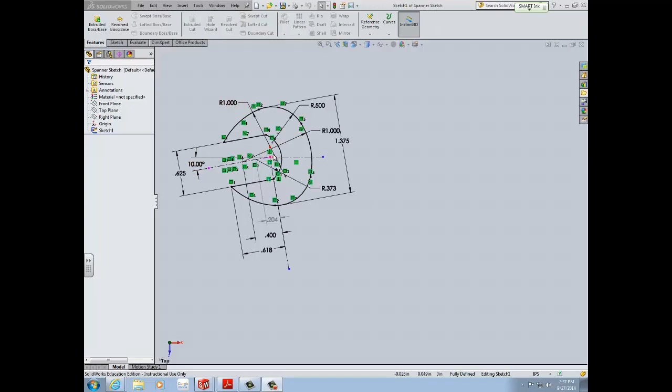Basically, I'm going to leave this up next to it. I'm going to just draw it right next to it. I'm not going to worry... actually, can't do that because I need the actual center point. That's going to clog up the whole area. So I'll keep this open, and I'm going to just create a new part.

I could switch from one page to the other by doing Control-Tab. Now I do have a lot of these sketches open. I'm going to close out whatever I don't need, like the previous job, making sure I saved my projects. There's the spanner, I need that one, and I don't need that one, so I'm going to close those out.

Again, all you need to do to switch between drawings is Control-Tab. You hit Control first, then Tab, and you can keep hitting Tab until you switch between two drawings: my part, which has no sketch whatsoever, and the actual spanner sketch.

So basically, we're going to start out with a sketch, and we're going to go from top view. We're going to create a center line, so make sure you hover over next to the origin where you can see a dashed line. That way you know that you're exactly on the origin.

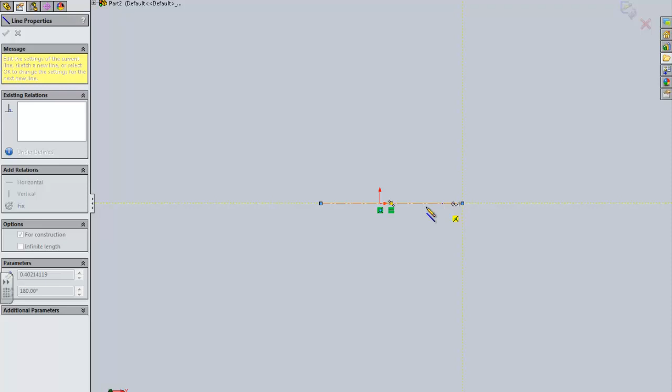You can see it's kind of, the line itself is defined, but the points are blue because we don't know what distance this line is. Everything else is black. Once we have that, I create a second line, a center line, from the origin, going about...

I'm looking for that 10-degree angle, so I'm estimating this to be 10 degrees. Now let's see how close I am. 17. I'm not good with degrees then.

So we do 10 degrees, we change that out, and of course that defines the line itself. It's black, but the points at the end are still blue because there is no distance provided, which we don't want because it's just going to clog up our drawing without necessary information. Usually center lines do not require exact dimensions.

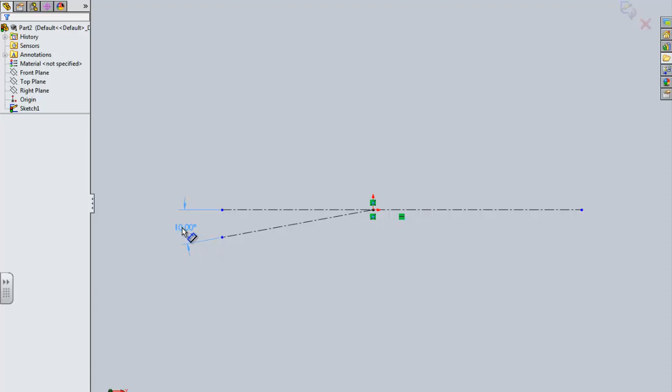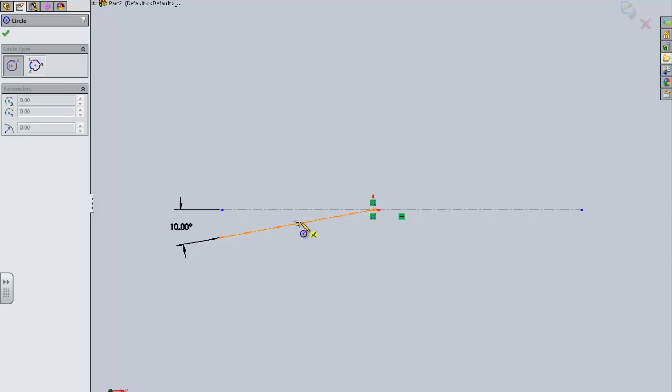From there, we're going to create - there's two options. We can create a circle. Yeah, we'll do that. So we need a point on this line for our circle. Make sure you don't snap into the midpoint because then you create a relationship that you need to delete later on. Just click it somewhere near that, as long as it snaps onto this 10-degree construction line.

Create a circle. The radius for the circle, if I can show you on the drawing, because we got this line here, we got the center line - you can see the previous drawing actually create a center line going one direction. You can do that too, it should not affect your drawing. We're looking for this point because we're creating this circle here, this arc.

So our distance is 0.204. Now you can see it's shaded - it's actually being driven, it's just for reference. So technically, if you drew it differently with all these numbers, that arc does not need a dimension. But that's why we need it, to draw it, make it easier for ourselves. So this is 204.

So we can dimension this out from the point to the origin. Make sure it's an angled distance, not a horizontal, because that's going to be a different distance. So you can just move it over, you'll see it angled, and there we're going to put in the 0.204.

So we have that snapped on, but we don't have the radius of the circle, so of course we need to dimension that out. 0.8, is that what I was looking for? Let's see what my radius is. 0.3. Okay, actually I'm working in inches. Okay, that's good, just making sure.

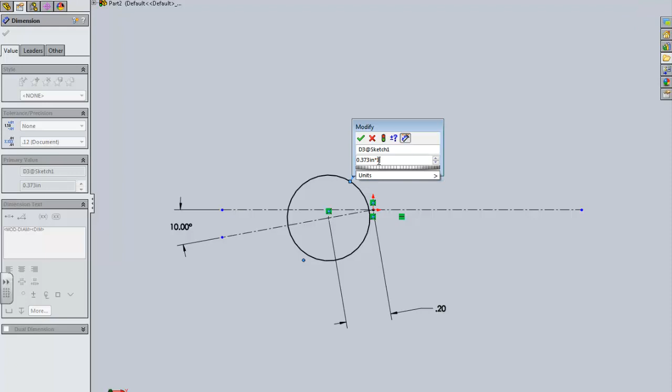So our radius for that arc is 0.373. I believe that's my diameter, so I need to double that. I do a star 2, and that multiplies it by 2. I got that number from right here, 0.373. So that gives us - and it's fully defined - so that shows us that we're exactly where we need to be with this arc.

We can add in the horizontal angled lines, like so. You don't have to specify its angle just yet. Another option would be to do one side only and then do the other side instead of doing both sides at the same time, but to make it easy, I'm going to do it at the same time. So I have these two new lines, the length I don't have specified. They are connected to my circle. I'm going to make them parallel to this 10 degree since it's defined.

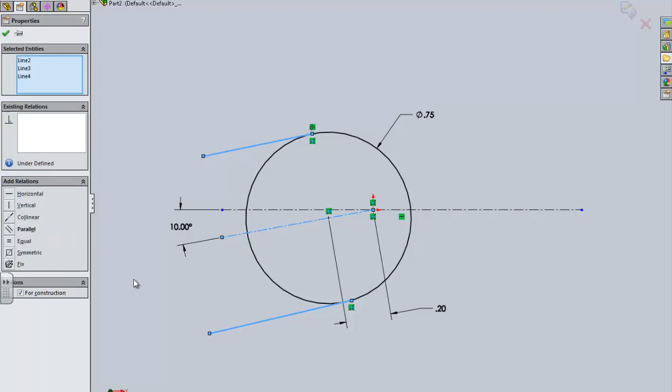So they're all parallel. This one is, for some reason, defined, and this one's not. I'm not sure why. Oh, it's not attached. Here's a tangent. This one's not a tangent.

That's all right, we do need to specify the distance of this. Also it is angled, so keep that in mind. Don't go horizontally, make sure it's angled. Our distance is going to be 0.618, and that would be equal on both sides.

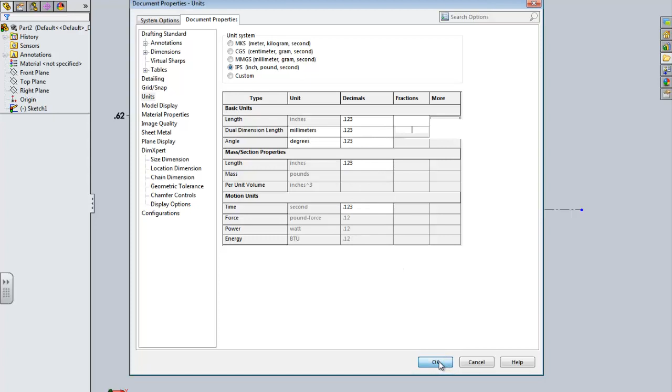Yeah, it's only 2, I can modify it to show you guys that there's 3. Let's see if I can do that right here. I'm going to change the length to 3 so you guys can see up to 3 decimal points since we are working so detailed. So now you have 3 decimal points.

Okay, once we have this piece completed, what we can do is start doing the trimming. So we go to our trim command up here, trim entities, and we just trim by drawing a line that cuts through the part. You can select the arc, the location, and the 2 lines here.

That doesn't look too well. And as you can see on the drawings, the point here, there's a center line, so we can actually add that center line. These points are connected, they're perpendicular to each other, I think. Yeah, so...

These are not connected, that's why I had a problem here. That's why it was tangent here, and it wasn't tangent here. So let me fix that now.

This is blue, make sure both of these lines are merged, so you don't have a problem like that with double lines. I need to figure out... yeah, see that? It's supposed to be a center line.

Following this dimension, and it is perpendicular to this center line, this 10 degree center line. So make sure you have that. Again, I drew a center line from the origin downwards, made it perpendicular to this 10 degree angle.

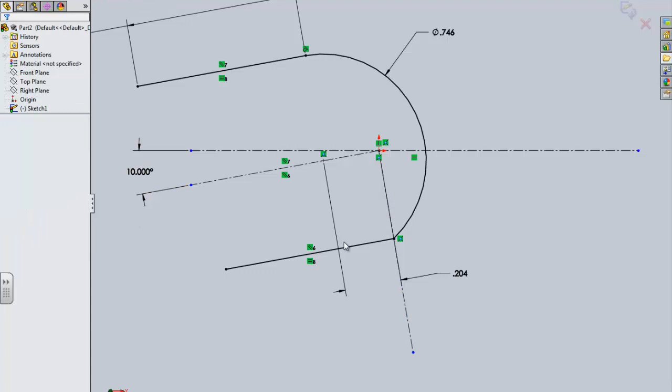Then I can select this point, end of this line, and this center line, and make it coincident. I also have to do the same thing with the top. The only problem is there is a tangent to it, so I will not be able to do it.

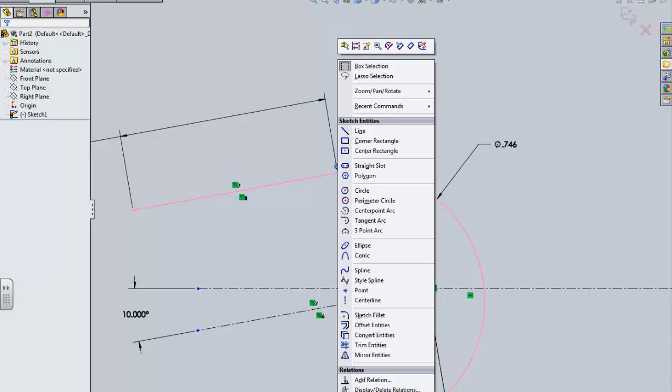Yeah, so I have to delete that tangent. I select the tangent and click the delete button, or you can select the tangent, right click, and go to delete. Two steps: delete on your keyboard, or delete with your mouse.

Then I can finally do the same thing as I did before. Select the center line here and make it coincident, giving me the exact shape I'm looking for.

Again, the center lines do not need to have their points fully defined, because they can be really long. It should not affect your drawing.

Okay, once we have that, what we can do next is the 1 inch radius circle, which we have the center point from, which is 0.4 from the origin. So we do the same thing like we did before, except instead of 0.204, we're going 0.4, and our radius is 1, or as a diameter it would be 2.

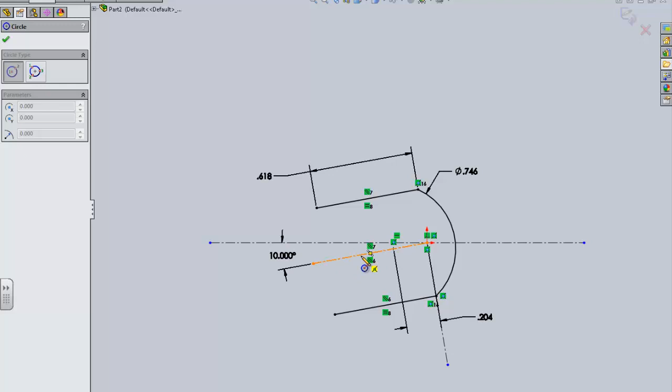So we go to a circle, we follow that 10 degree center line, we draw a circle, and that is going to be 2.

Like so. From there we can add, there's two arcs. There's one arc coming this way, and there's another one that's connecting the arc to the main circle we just created. See, there's one arc here, it's highlighted, and there's a second arc here.

So we can create an arc this way, in which we have the radius. We don't have the center of it, so keep that in mind, but we do have the beginning and end points. So we can do that, as long as we make them equal. I'll show you how we do that now.

We go with a 3-point arc. Right, I'm looking at something like that. Same with this. And I'm going to make these equal to start out with.

I'm going to dimension one of them. The radius will be 1, so it's a 2. Something like that, it's really big, but that's alright, you can even stretch it back down.

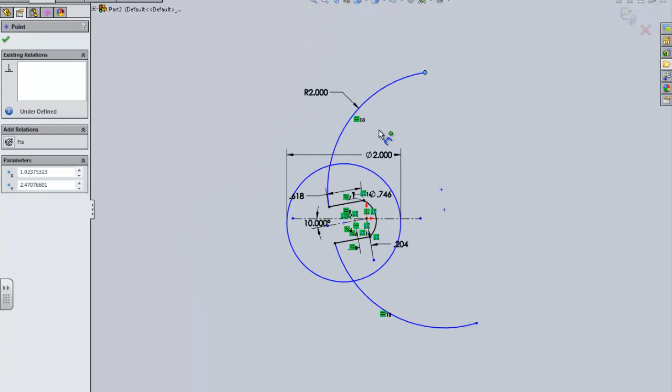Oops, I'm still in dimensioning, if that bothers you. Now they're both the same radius, but they're not the same length. That's also okay, we have our distance—no, we don't, we don't have our distance here from here to here, so we've got to add that dimension.

Oops, so smart dimension. Oh, we do have it, because we have the radius here. I'm not sure when I put that in. So if you have that radius, you can remove it. If you want to keep it, that's fine.

The other option would be to create this dimension here, which is 0.625. So you can see it was off, so now I have to readjust it to make it exactly the correct size, as our drawing shows.

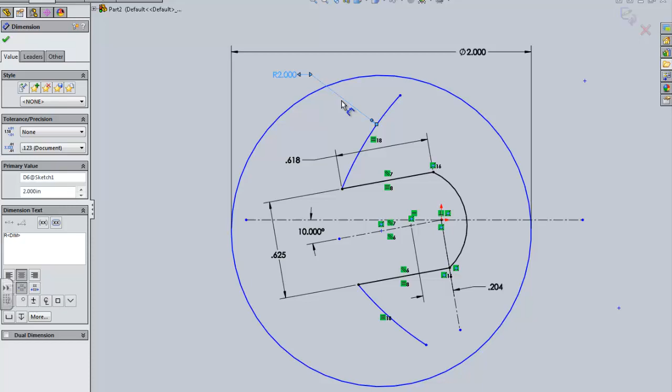We have our radius, which is diameter 2, which I can convert if you guys prefer having diameter. Just change it in your units, go to diameter, and it shows diameter, which I made too big now.

Do that mistake sometimes, especially if I'm going too fast. So that should be 2. My apologies, that's a 2 in diameter, just like our main circle.

I don't know where I got 4 from. But okay, so we have these points, they're fully defined. Our second option is to fully define the endpoints, because if you look at the drawing, we do have that 1.375 that gives us the endpoints of this arc and the beginning of the second arc. So we can do that too. We can add the dimension from that point to that point. Make sure you're in angle, not horizontal, vertical, just angled. And we're going to type in at 1.375.

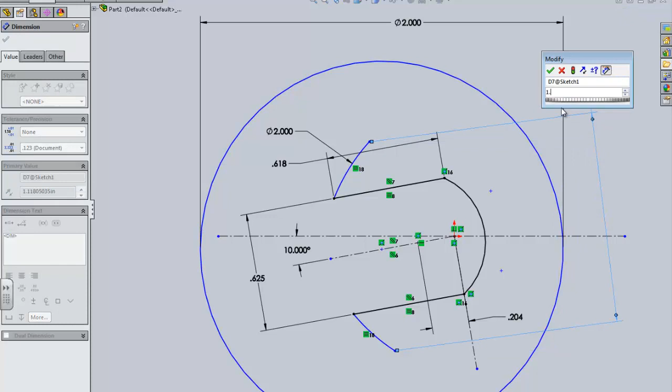Now that should be, we can't do the, looking at this, we got to make sure that they are both, give me 1 second. So the best way to resolve this 1.3 to make them both the same exact, matching from both sides, would be to do an arc length, which is basically you select both endpoints and the center, giving you the arc length. And then, I thought I have it equal. This and this should be equal. That is equal.

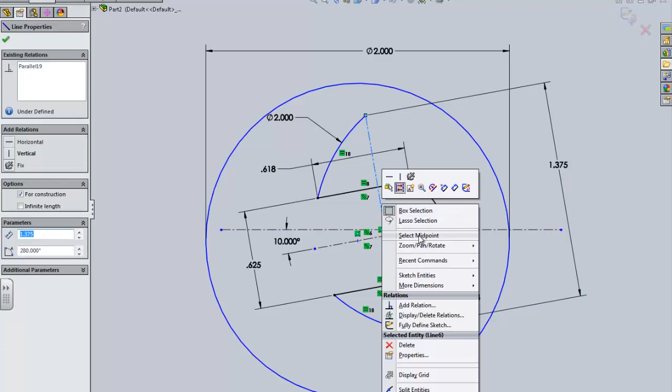Alright, so I'm going to do it a little bit different from the drawing. I'm going to actually create a center line from both these two arcs, the endpoints, giving me the distance. And I'm going to make it collinear with this angled center line here, so make it parallel. And that gives me the arc. But the only other issue is I need to make sure the center midpoint matches with this 10-degree center angle, and that will give me exactly the 2 arc sizes I need.

So there might be a better way of doing this. I don't know, this is my first time running through this pretty fast, so that is my option for doing this.

Now we have this arc. Now we also need one more arc to connect this arc to the main circle. So we can do that, just snap it on. And make sure you don't snap onto any additional things because we don't know what the exact shape is just yet. We do make them equal, and we do have a dimension for them, which is going to be 5. So I think that's, oops, that should not be that 5.

Let's go back to that just a little bit. I'm going to leave that for now as is, so otherwise I'm going to be in trouble again, like we just saw.

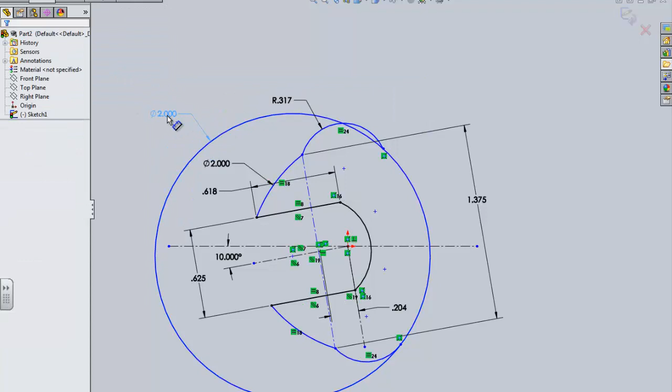So we get the arc, we got that. We have the side. Do we have this dimensioned? Yes, we do. I'm going to do a little dimensioning like that. I prefer using that side dimensioning for the circles, that way I know what it relates to, not the overall length.

There's something I'm missing here. Which radius? You try to divide the distance by just 0.5. Yeah. Oh, is it 0.5? Oh, that's why I missed it. I don't know why I put that, that's why I got it wrong. So it's 0.5.

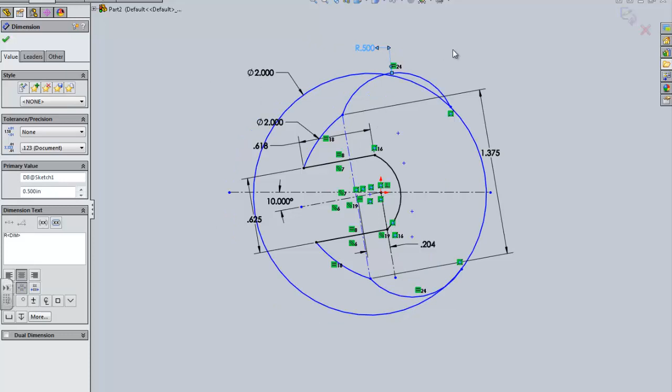Alright, so I'm going to trim this all out just to clean it up. Oops, there we go, I have something like this. Now I have the distance for this. I do have, oh, there's more trimming I must have missed. Ah, still got the trim activated. Oh, I see, the arc wasn't... well, it is connected.

That's okay, that's equal to that. That's equal to the length. This should be shorter.

Tangent, that's what we're missing. Don't forget about tangent, that's what we need. So we need to make all these parts tangent, so make sure you have tangent on each. This one tangent, this one's tangent, tangent, and tangent. So there's 4 of them.

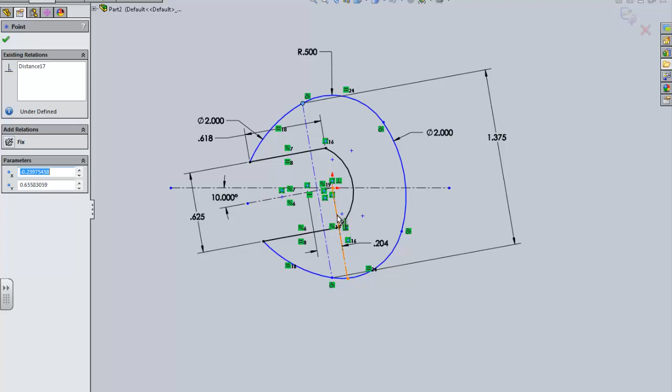But that still does not give me the full, it's not fully defined yet, so we need to verify what is going on with that. So it looks like that center line is perpendicular to that 10-degree line, to this line here, the one next to the left of it. That one to that. No, it's not perpendicular to the 10-degree center line. Are you sure? Because it looks like it.

So what I need to do is not dimension it from these endpoints. What we need to dimension is from the actual 2 arcs. Now you're going to get something like this because it's going to grab to the center of the arcs. We're going to drag these endpoints to be coincident or perpendicular to these 2 arcs, the 0.5 radius arcs. And that's what needs to be set at 1.375.

Including with that, we need to go to our leaders, and we've got to make sure that this is set at max here, at the arc conditions max. That's actually part of the instructions for this. So make sure that's set at max.

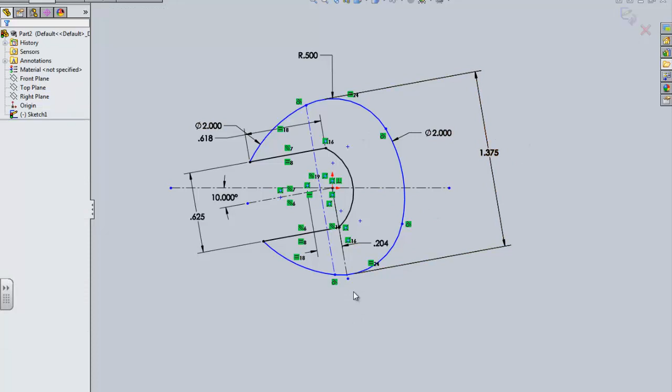But the next step would be to get these points, these end of the arcs, and we're going to make them symmetrical to this 10 degrees. So I select these 2 points and the center, and I make it symmetrical. So that evens out, and we might have to do the same thing for these 2 endpoints here, just to play it safe. That's one more step they need to add.

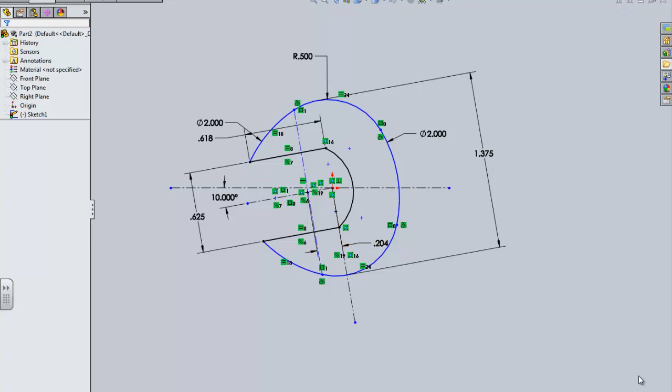Well, you guys wanted to design this, so here, I'm going to record this. So the way, if you can't figure out what the issue is, try moving the part. Sometimes that helps you discover what your... yeah. Not me, I'm not paying attention.

All right, so what we're missing is actually the dimension location, the center point of this 2 diameter inch circle or arc. So that's what we were missing. So from the origin to the center point of that arc, it is not 4.45, it's actually just 0.4. And now it's fully defined.

Yay! Exactly. Actually, we can move it forward because it looks like, oh no, this arc, we don't need this center line anymore, and it actually matches up exactly to our design here that we received. Right? I think it looks the same. Maybe it looks a little bigger for some reason.

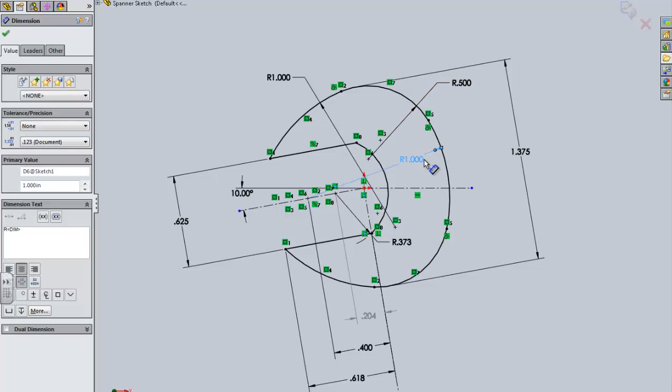0.5, this is a 1 inch radius. Oh, I have diameter 2 inch. Let's change that to radius so it looks a little bit more professional. It looks the same as what they had there. This is 0.5, yep, this is 1. Oh yeah, I can change that. Let it be radius.

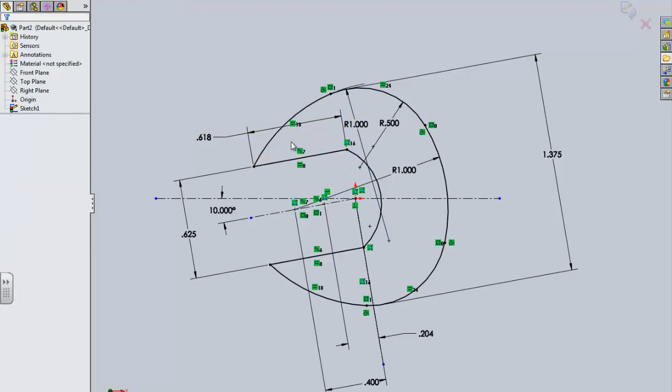10 degrees, yep, 0.4, yep, 0.618, 0.204. Oh, there's one more, that's why I'm missing it. Oh no, there it is, 0.618. Yep, all dimensions match. So that is the correct way of designing this part.

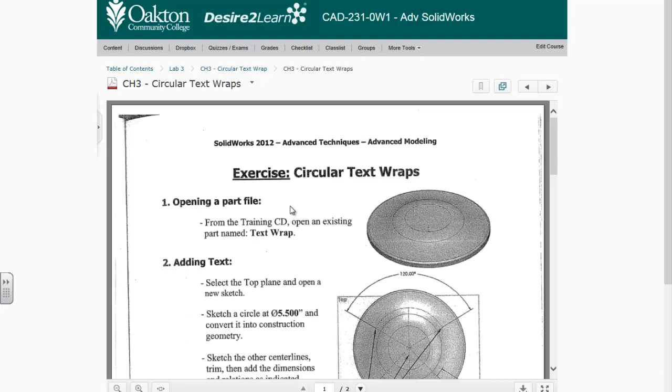So all we have to do now is go step by step by the book. So if you have the PDF open, that's great. If you don't, it is in the D2L, it's called the spanner wrench. And basically, we can go step by step. This gives you some basic information.

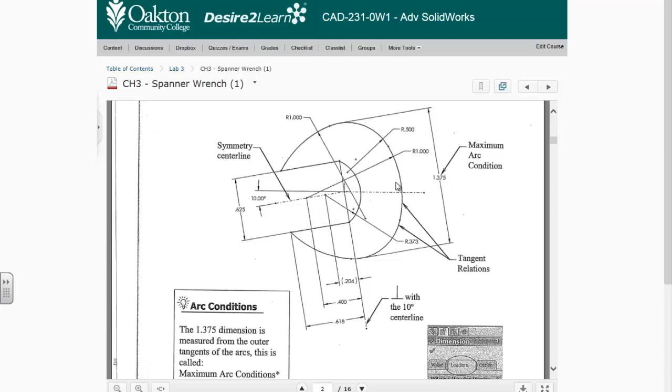There's a max arc condition, so if you do decide to make this on your own, make sure that is tangent to the arc here, not to the endpoint. It may seem like it's going to the endpoint, but it's really not. It's going to the actual arc center, pretty much like the center of the arc, and that will create the max size of that piece. So keep that in mind. Here's some basic information on how to get to that.

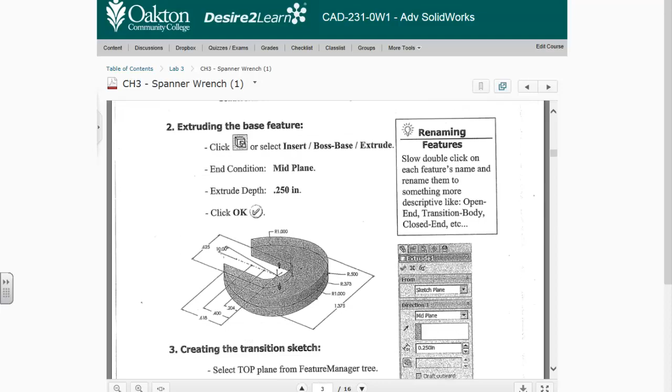So we'll move forward and start doing that. The actual features menu, we go to extrude. We are going from blind, we're going to midplane. And there's another way of testing your drawing: if this is not going to extrude, won't work, then you know that your original 2D sketch has an error and you should resolve it.

The end condition, which is midplane, so we change that to midplane, and our extrude depth is 0.25, which is our total depth. We accept that, and then we go to select top plane from the features manager.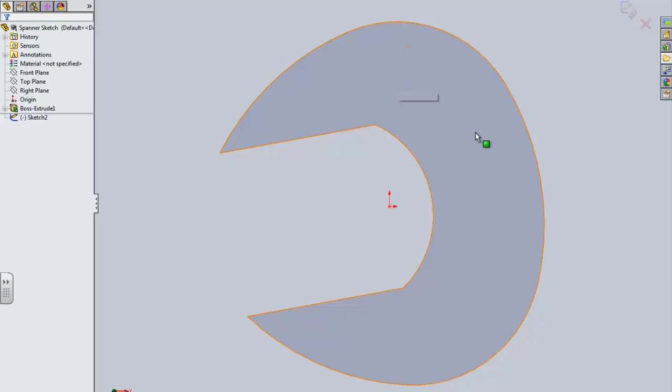So we'd start a sketch. It's going to ask us to select the top plane. We go perpendicular to. See, that's something that the book doesn't provide, all the step-by-step process of actually drawing this, because it kind of gives you an idea of what you need to do next. It doesn't tell you, oh, make it normal to, and so forth.

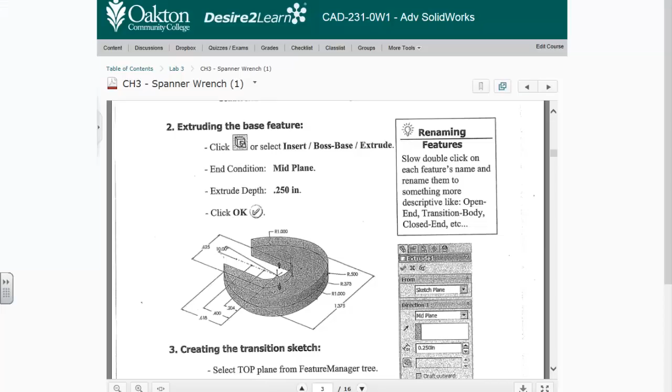Then we add the drawings as specified. So if you scroll down here, you will see the add dimensions, and you'll see the dimensions we're adding. So we do a center line from the origin. The origin is the center point of the head. And we go across, there is no specified distance, so keep that in mind. That arc, that center line is just for reference.

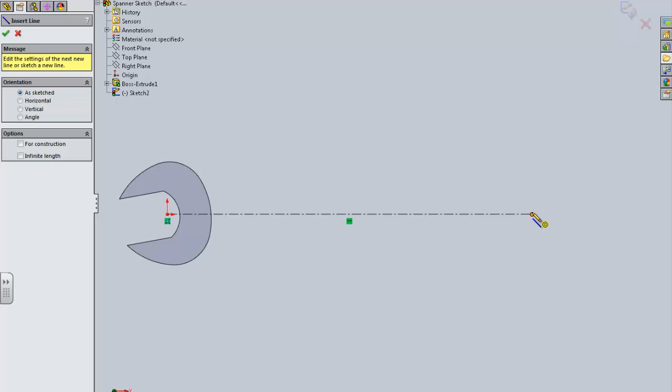So we go to sketch, we go on the plane, we create a center line from the origin. We go exactly horizontally. We're only going to create one side, I believe, and just mirror it over. And that would be like the simplest way of doing it. If you don't want to do it that way, you can design both sides at the same time. It's up to you. So we're going to go up, across.

There is a radius here, which I will do later on. I can do it now, but it'd be too confusing. So we're just going to go straight.

There's a second radius here. Don't worry about that. And we'll finally connect it to... yeah, it looks like it's coincident. Okay, now we can do the radius.

The first radius is 2, like so. Or if you like, instead of going with the radius, we can do the dimensioning first and then put the radius in, which is our fillets. Actually it's better to do the regular 2D lines and dimension those out first before the radius, because it's really hard to dimension where the radius is located. So keep that in mind: do the lines first, then do the radius. I make that mistake sometimes.

And if you do decide to do it only on one side and mirror it over, keep in mind if you put a dimension here for the back, the full length is 0.95, so you would just divide that by 2.

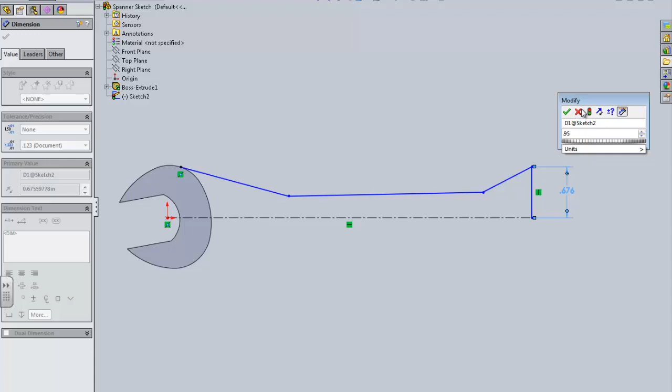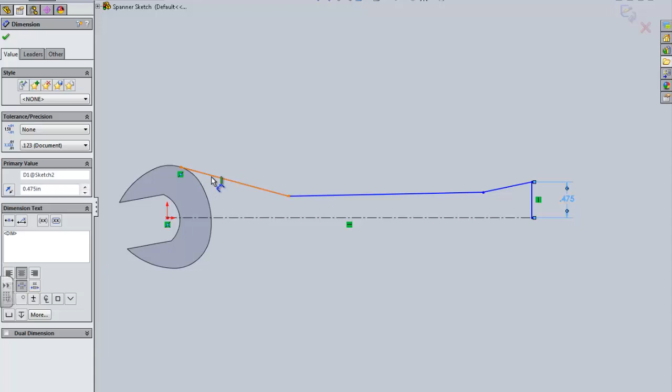It would be the same, your own preference. So you're saying you would just do an arc here? Yeah, yeah. I might have to go back and actually do that. We'll see.

So next one will be the center, which should be horizontal. It's not - you can see by the degrees. So I need to go back to that line and make it horizontal by selecting it horizontal.

And then we go with 0.525 divided by 2. That gives us a dimension there. And our location from this endpoint to the back is 0.75. And it doesn't specify the angle.

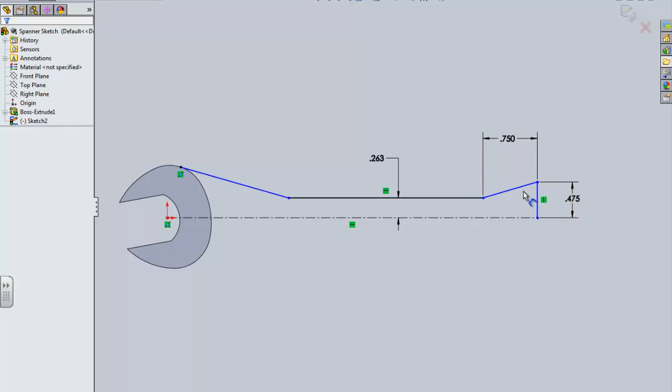Oh, it's a whole radius? No, it's a radius and a straight line from what it looks like. So we can put that radius in now just to look for it. Check it out, that's what it should look like.

But it is still not fully defined. That is an issue - we'll go back to that later on and see what we can do to fix that issue.

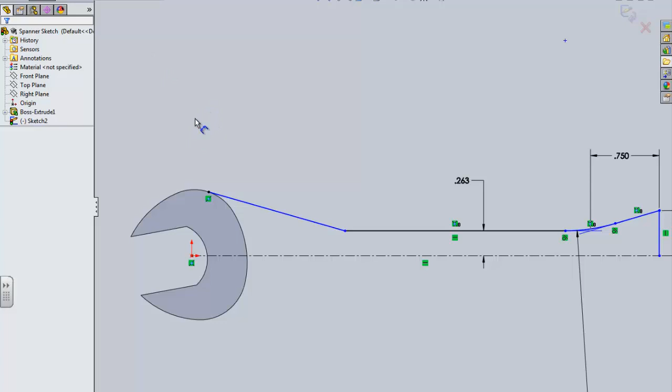Our next part will be a distance of 1 inch - not from the origin, keep in mind, this is from the actual point where it connects to the 3D object. 1, and then we can also place in the total distance, which is 6.25. And that fully defines my object.

So that arc is only from here to here. You can barely see it on the drawing, but it does show you 2 points. So looking at these drawings, or any future drawings, keep in mind each point represents either an end or beginning of a line. So if you get stuck, like here you can see there's one and then a second line. I may have made a mistake because I missed that line, so it looks like there's 2 arcs. This is the radius and the rest is just a straight line, which is fine because I did a full straight line from here to here. Adding that 4-inch radius will make that 2 parts.

So now I can add that radius here. It's 4. And as you can see, this is a separate line right here, just like the drawing. That's what I meant by that.

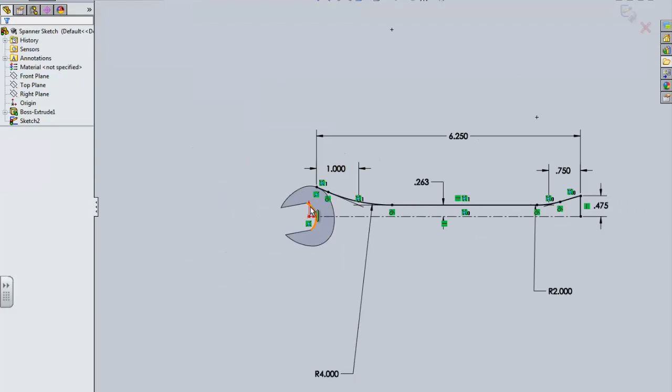And since it's fully defined and I like how it looks, I can just select, making sure I select all I need, and mirror it over - entity mirror about, as a copy, this center line.

The only issue I have missed is because it's not completely enclosed, we need this line here to enclose it so we can do the extrude as our next step. So we need to convert entities.

Actually there's a couple arcs, there's 3 arcs, and we accept it. Keep in mind it's overextended, so we do need to trim this out. And there's maybe - you can see it here - there's an issue here. I have to solve that before I move forward.

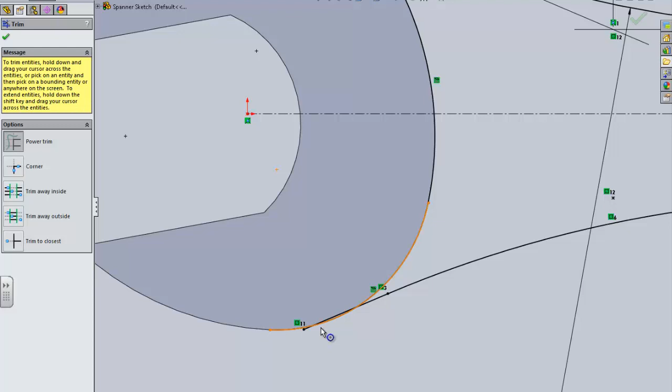So I'm going to trim this side. This other side is different, because when I did the mirror, the bottom of this circular object here is different from the top of it. So you kind of have to fix that up. Clear that up.

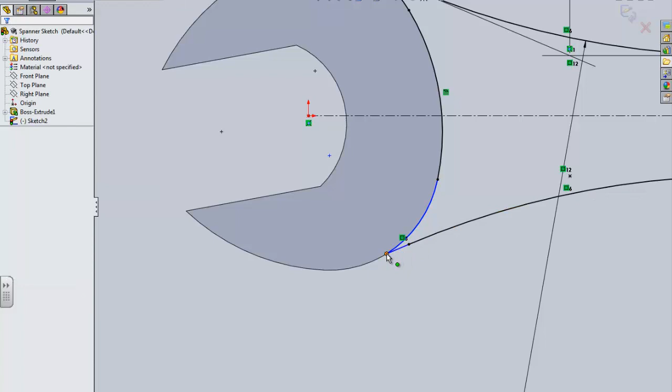This one is a little tricky here. So we have to select this line and the arc, and we make a tangent. That resolves that. This one should be convert entity, but something happened with this - I'm going to delete it and create one more time.

Convert entities, accept that. I'm going to see that endpoint is not snapped onto that arc, so again, coincident - make that coincident - and it's already tangent, and I trim it out.

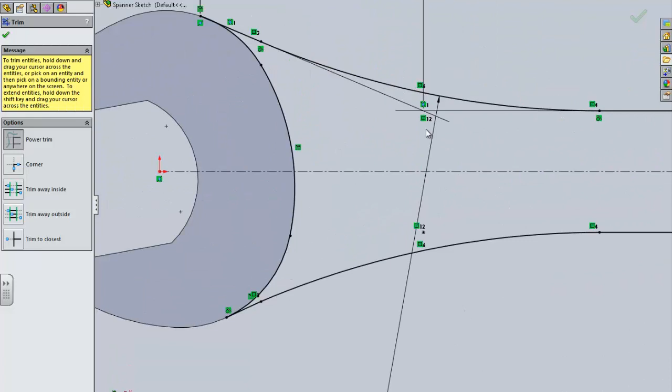So keep in mind, if you do it the way I did with the mirror, this area will need to be resolved - there are some issues. You saw that I had to fix it, so keep that in mind and resolve it before you do any features extrude. And you can check it's not fully defined, or let's see if it's - oh, it is fully defined.

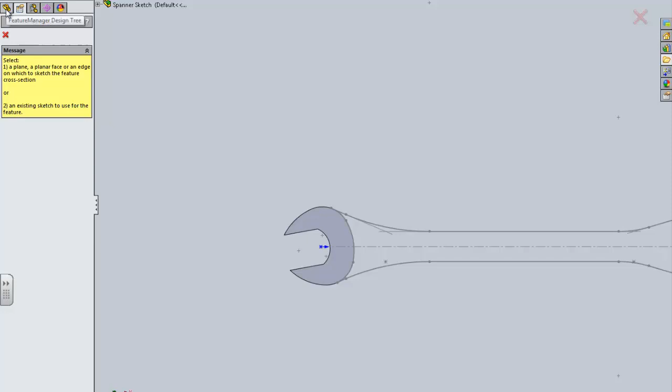So it's fully defined. Now all I have to do is go to our next step, which would be to extrude this area. This area will be extruded from the midplane, 0.175.

Self-intersecting. This is not good. Let's try that again.

0.175 midplane. There are self-intersecting contours. So this will happen sometimes. You will find that something is overlapping itself, there's double lines somewhere, or something's wrong. So we need to resolve this.

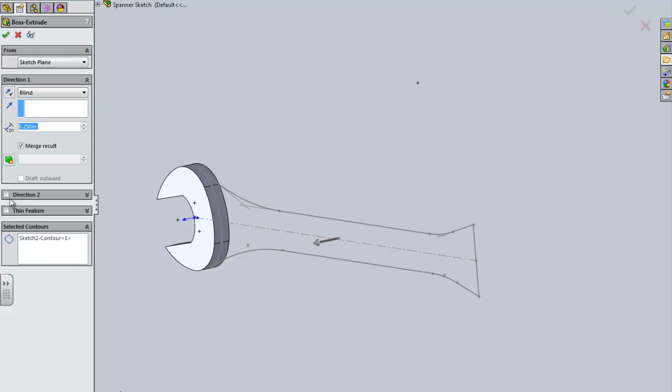An option for that would be using extrude, selecting the object. Here it's got a trick. Of course, let's see if I can do this in this one. The idea would be to select it, but I guess it's not going to help me with this one. So we have to go back to our drawing and actually find the situation that's causing this problem.

Where? Top? Oh right, nice. So another thing that the actual instruction book doesn't tell you is that there's an area here where it's overlapping, as you can see. So we do have to trim this out.

We're losing that dimension, the exterior dimension, so it's no longer fully defined. We need to make sure that this is tangent or coincident to the arc, the shape, and we could put in that dimension just to verify that, and change that, because we actually need 6.25.

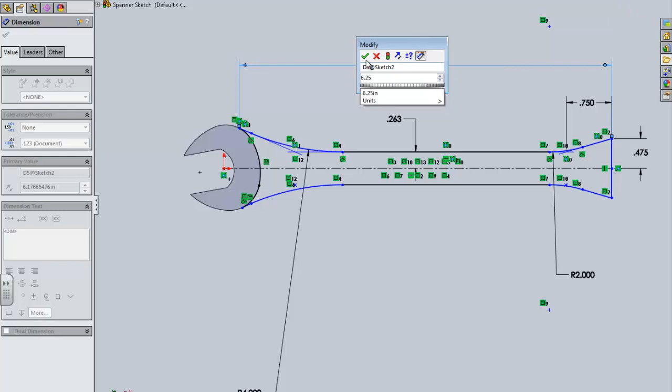And we're still missing something. I think we need to make, oh, still overlapping. This is not good. So I did not resolve the problem here. I need to make sure I do that.

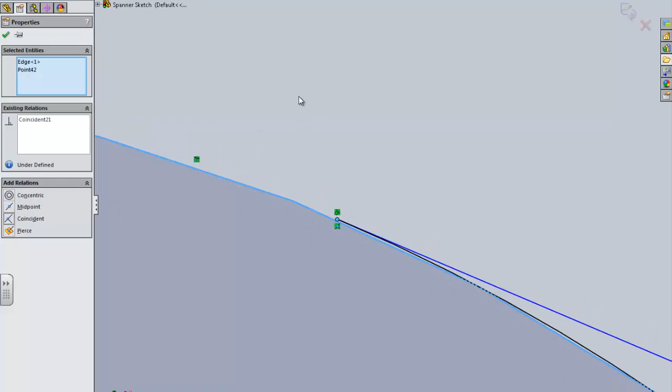But I do have a situation. Now it's not fully defined. Baloney.

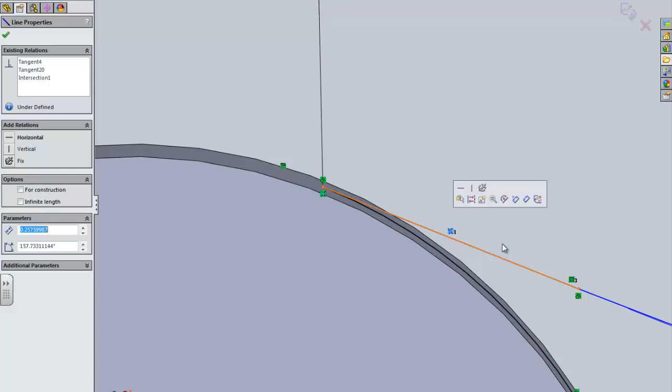To make sure that everything is consistent, this should be tangent. Yep, this is tangent perpendicular. This is a curved entity. This is tangent, that's correct. These lines should be tangent.

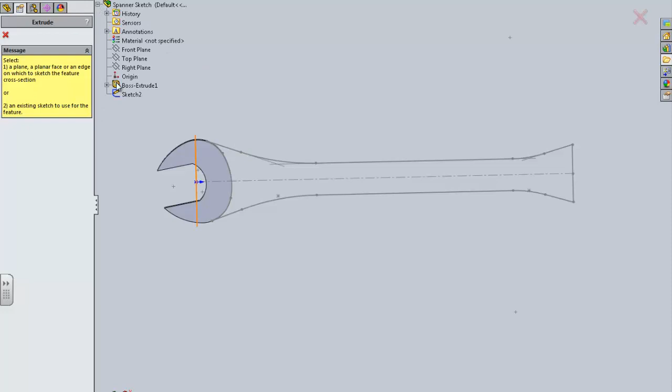There you go, that was the problem. I missed a tangent at the bottom here. So make sure you have all the tangents correctly placed and it's fully defined before you move forward. Then I hope that this time we can, yep, now it works. Now we can go mid-plane and we go 0.175.

Creating the arm. I'll pause for a minute for you guys to catch up.

Alright, so next part would be to insert a sketch on this face in the back. So we go to sketch, plane, normal to, and we're creating a center line horizontally to the midpoint of the material, like so. It's fully defined, got 3 points. I accept it.

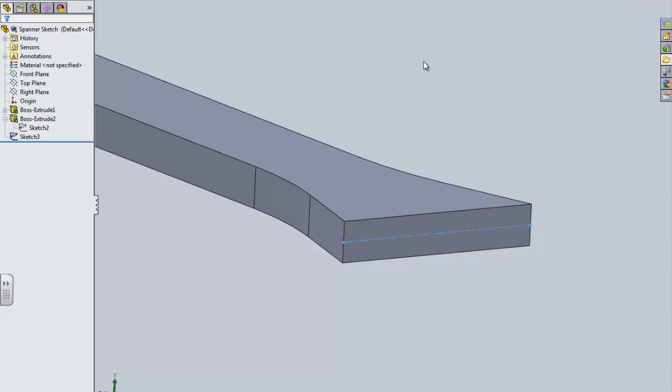From there, we're going to create a plane. So we go into features, plane. We start with the top plane as our reference, or no, it wants our face - top face. And we select this center line that we created. In addition to that, we create a degree of 10 degrees. That's our new plane.

Is it the right way? No, it's reversed. So I need to reverse this way. Why is it? Reference plane, click flip, that's what I'm missing. Flip right here, click that in, and you got it from the bottom. And we accept that.

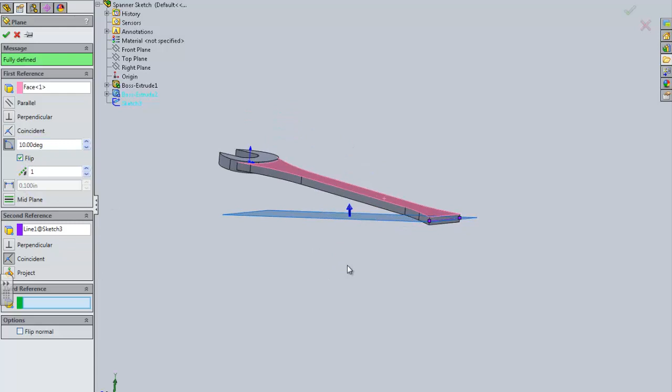Next step, after having a 10-degree plane, all we want to do is create a sketch on that plane. So we go to Start Sketch, select that plane, go to Normal to, and we create a circle.

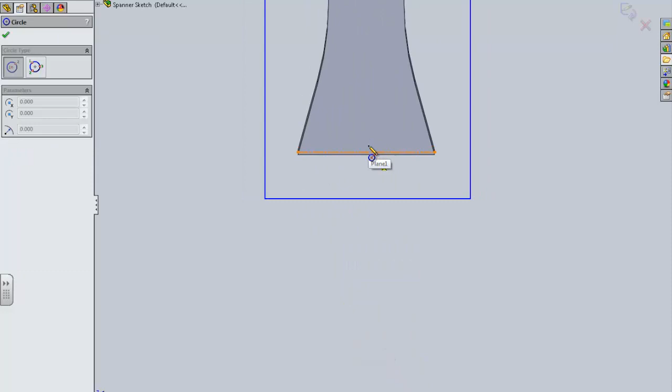So we're creating a circle that is based on the origin, which is exactly the center or the midpoint of that line. And we create it to, actually we have a size to do - we have a diameter of 1 inch. That should be, so we might have to add in that actual origin to center or vertical, or it might be horizontal for you guys, depending on how you drew it, how this is set up right now. And we have a distance locator from the origin to the center of the circle, which is 6.5, like so.

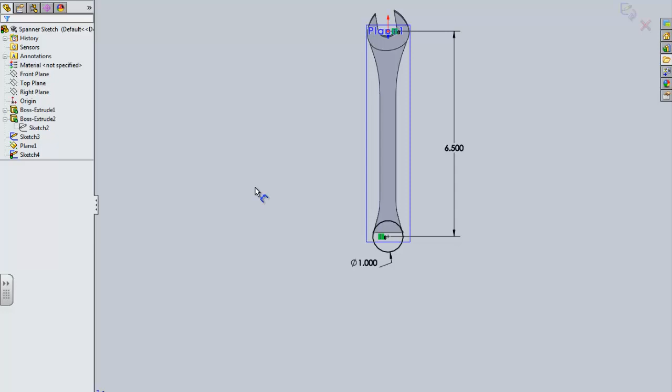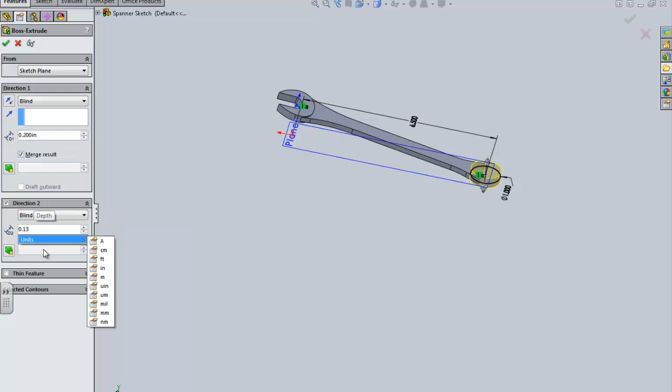We can close out of the sketch, or we can go directly into extrude, which I prefer doing - it's one less step. You do the extrude, we do blind one way of 0.2, and then the second direction, a blind of 0.13. Now try not to get these confused. We are going 0.13 down and 0.2 up. You accept.

I like to turn off planes that I'm not using because they're just interfering with my view. So I'm going to turn that one off by selecting it and selecting hidden.

Next step for this, oh man, there's a lot of steps for this one, is to insert a sketch on top of a polygon. So we start a sketch on top over here, we go normal to, we create a polygon based on the center, like so.

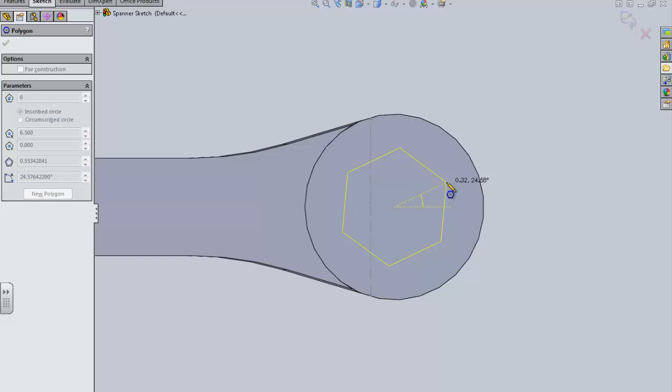There's a few specifications: select face, insert, select a polygon, 12 sides, enter, and add 0.625 for diameter. So over here, down here, we go 0.625, enter. What else do we need to put? We need to make constant, concentric to the outer circle. So we select the dashed circle inside to the outside, and we go concentric.

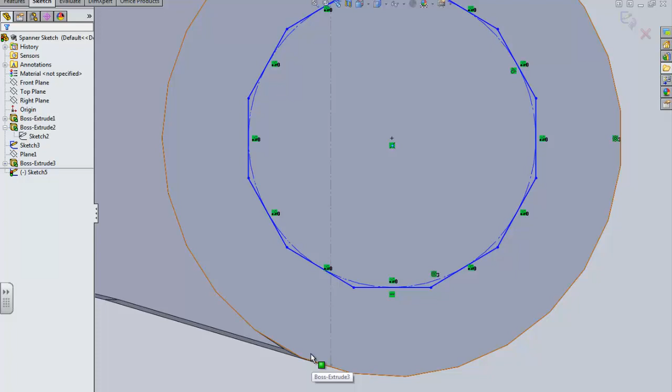And horizontal. We make this horizontal, concentric horizontal between the two, and just to make sure we take this. We need, what else do we need here? I think we can.

The diameter we have, yes, 0.625, like I said. So we keep that, and that's pretty much fully defined. From there we go extrude cut through all.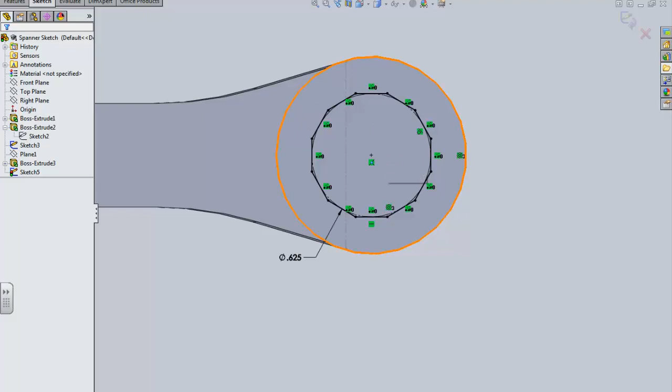I believe the drawing decided to do it on the plane when you're drawing this. I did it on the face. You can do it both ways, and it works. So any way you do it, I'm gonna cut it through all.

Did that, and I move up to my next step, which is step 11. We actually select a sketch on the top surface, and we're gonna create a slot. So we go normal to, and create a slot here. Under the rectangle command, there's a straight slot, which we're going to be using.

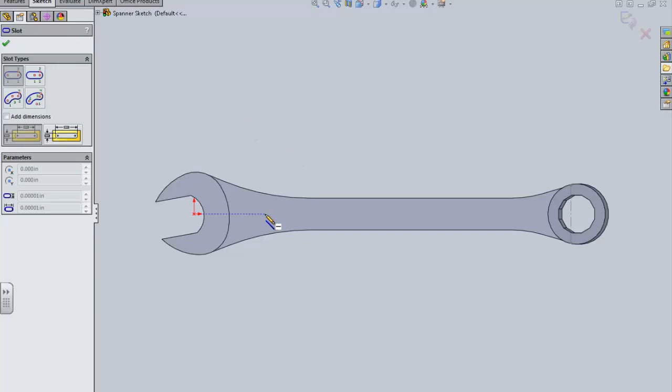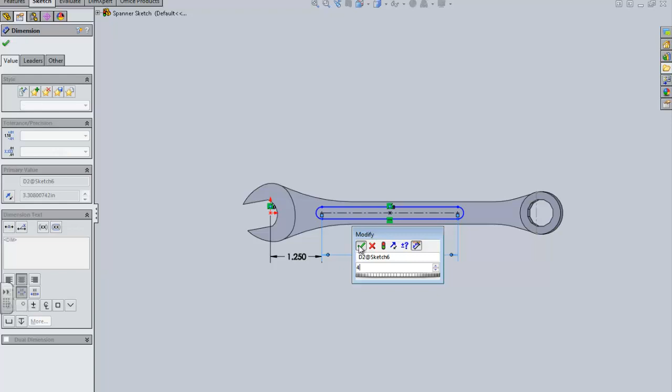It's pretty much selecting a first point, second point, and how wide it is. Then we dimension in the locations of all the points, which we have on the drawing: 1.25, our second dimension would be 4, and its width is 0.325.

Like so, and we do an extrude cut, 0.03, my bad. So there should be a slot, as you can see here.

Looks great, and it wants us to do a mirror of this cut. So we select the mirror command, we select the top plane, we select the cut as our feature to mirror, and we accept. Creates the cut on both ends.

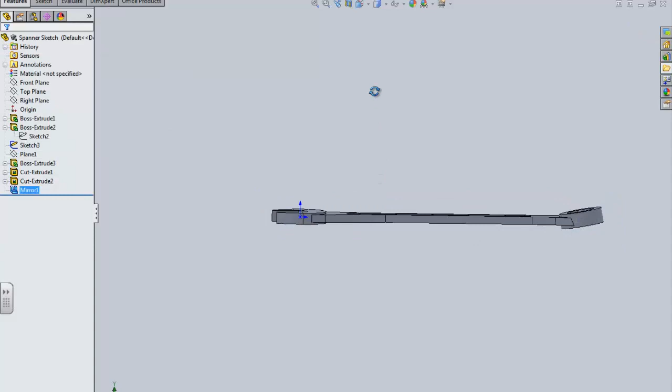Adding the 0.03 fillets. So now we can just add the fillets, which are on the exterior, I believe, not the interior, where it's actually a little tricky to see on the drawings. We got to select from both sides. So we go to the fillet command, 0.03.

And let's start from the front. So it wants us to select this, that, all the way around this arc area, all the way around the top, and of course if we do the top, we do the bottom.

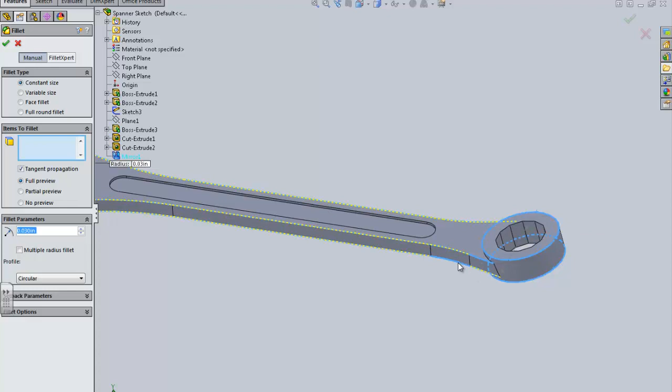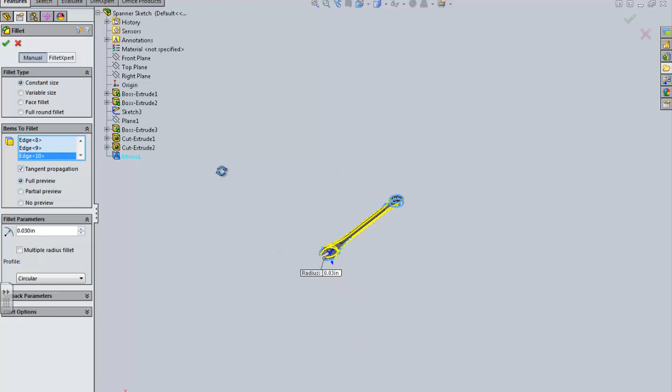Now of course if you select the wrong ones or you missed a few, you can always add them or subtract them. But I think that is all. It should specify how many we need to do, but it doesn't. So that's one of those lessons that SolidWorks needs to come up with. We accept that.

In addition to that, we're also putting a fillet with a radius of 0.05, and this time it's going to be on the inside here, both sides, and in the back, same thing. This edge here will automatically select both sides, so that's great. I accept it.

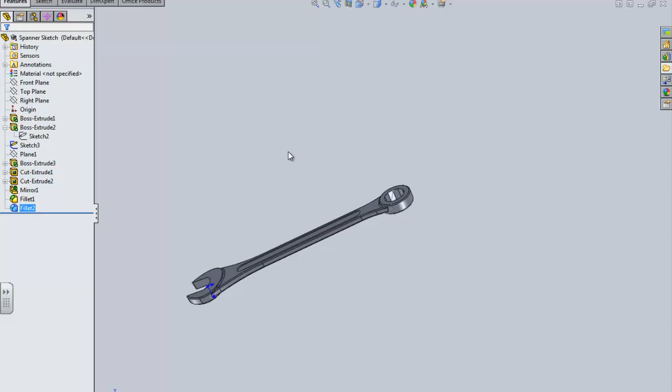Oh, there was actually more fillets. I kind of made a mistake of... oh no, I did the right thing. Okay, so fillet, third fillet, 0.015, and we do the inside here.

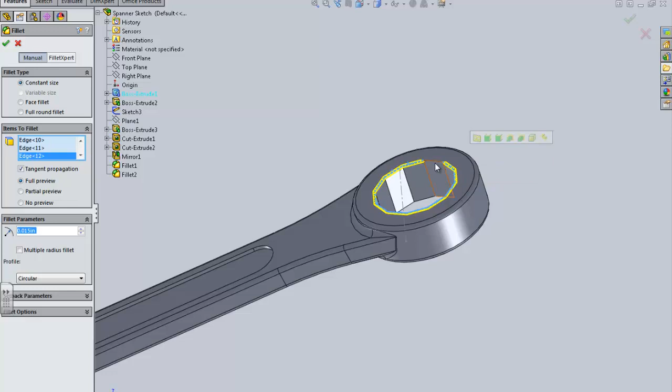Yeah. And of course, if you do it at the top, you do it at the bottom.

Remember, save your work before you move forward. And we go to our text option. So now we go with sketch. We start on this surface here inside the cut.

We use the text tool. We type in 5/8 for our text, and we select it at one position, and we click accept.

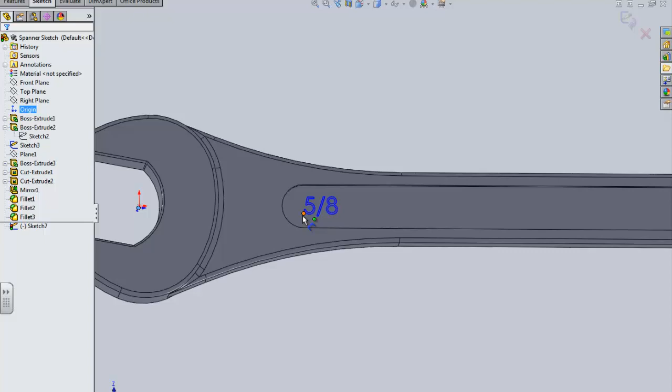From there, we dimension out its location. You can see a point right there. That's what we're dimensioning to. So, 1.325, and it's also horizontally 0.075. If you can't get the horizontal, you can do a smart dimensioning. Instead, you just go to vertical dimension, and that should help you position it better.

Now, I missed out some things because I was supposed to specify the sizing of this text, which I didn't. So I'm going to go back to it, and I'm going to start changing this around. So we turn off the use document font, and we go with the width factor of 150.

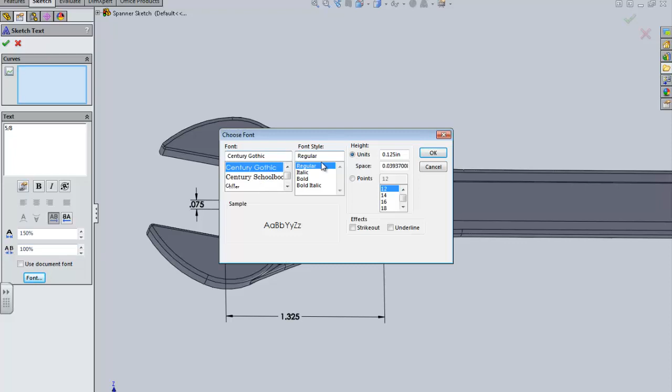We go with the spacing of 100. It wants us to change it to Century Gothic, which we have, regular, and 14 point. Come on. Oh yeah, switch that on, and we click OK. Now it's complete. Huh?

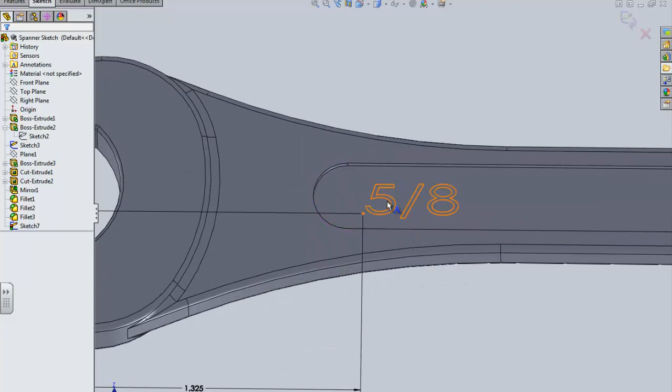That was weird. Click on it. Oh, so it should be positioned correctly. Not sure why it moved that way.

Let's see if I need to fully define this. No, that's fine. And we go to our extrude cut, or it wants us to add material. I'm going to subtract material because I'm different. So I cut it in 5/8.

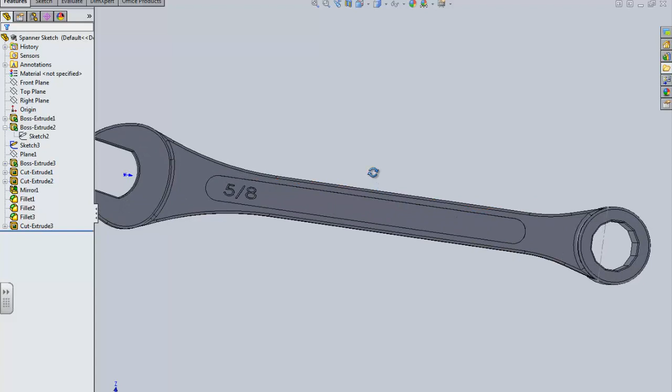Then you do the same thing for the other text, which is the spanner. I'm not going to go over that because it's the exact same setup, and I assume you guys can handle that. It also is the same Century Gothic, regular, and 14. So this, after you're done with that, that actually concludes the tutorial.